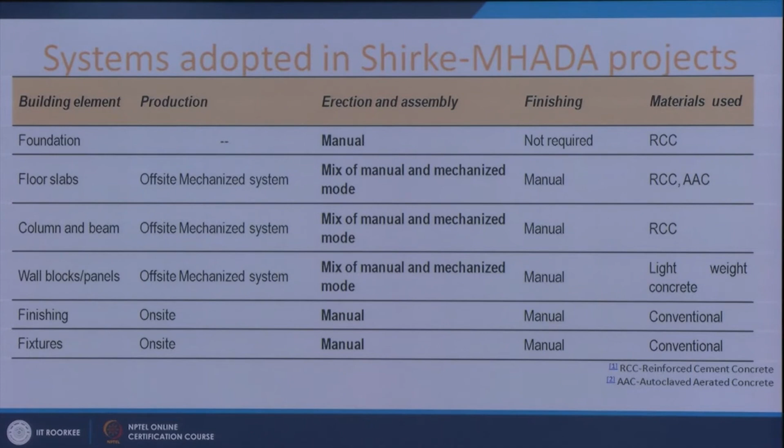The example we have taken is MHADA, Maharashtra Housing and Area Development Authority, which has tied up with a private company, a manufacturer of innovative building materials called Shirke. The partnership between Shirke and MHADA handles most of the affordable housing and housing for the poor across the whole state of Maharashtra, especially in Mumbai and other major cities.

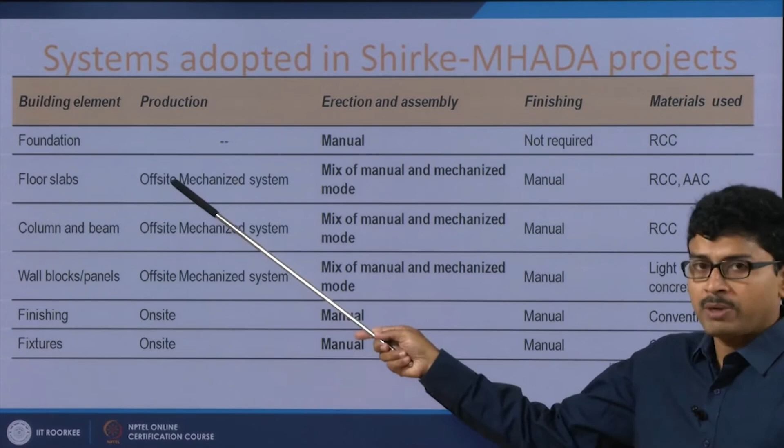The materials used cover every component of the house: foundation, floor slab, columns and beams, wall blocks, finishing and fixtures. For the floor slab to wall blocks, they use an off-site mechanized system with blocks like reinforced concrete block or autoclaved aerated concrete block, or lightweight AAC block. The foundation is done manually and RCC is done on site, and the finishing and fixtures are also done on site.

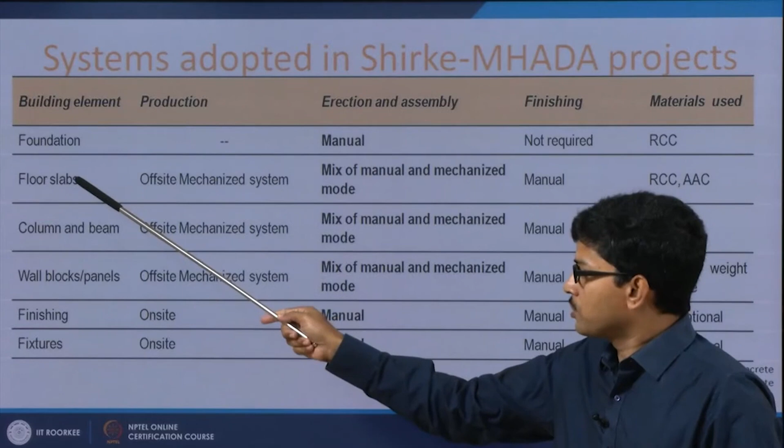Apart from the floor slabs, column beams and wall blocks, the foundation and finishing and fixtures are done on site, mostly using a mix of manual and mechanized modes for floor slabs, column beam and wall blocks. Since foundation and finishing and fixtures take place on site, these are essentially, by and large, manual processes.

To illustrate this, we have taken three different cases, projects at different locations like Mankhurd, Pratiksha Nagar, and Mazgaon in the city of Mumbai. One project is under construction, another was completed a few years ago, about 5 years, and another was completed more than 20 years ago, so that we can understand the quality, durability and performance of this building and housing typology.

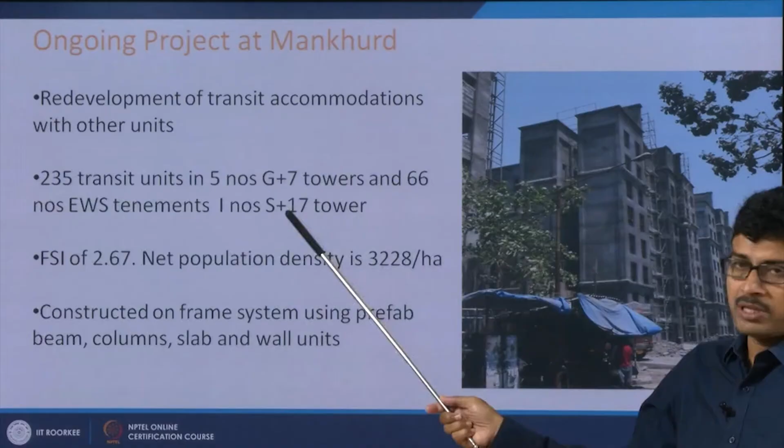This is an ongoing project at Mankhurd. It is a redevelopment of transit accommodations done by MHADA. It consists of 235 transit units in 5 numbers of G+7 buildings, and 66 number of EWS units with stilt plus 17 storied high. They have used an FSI of 2.67, and the density is above 3000 per hectare.

Those coming from a planning or architecture background will understand that this density is quite high in the Indian context. In major cities, the net density calculated in a particular plot is usually around 1000 or 1500 maximum, but here they could achieve more than 3000.

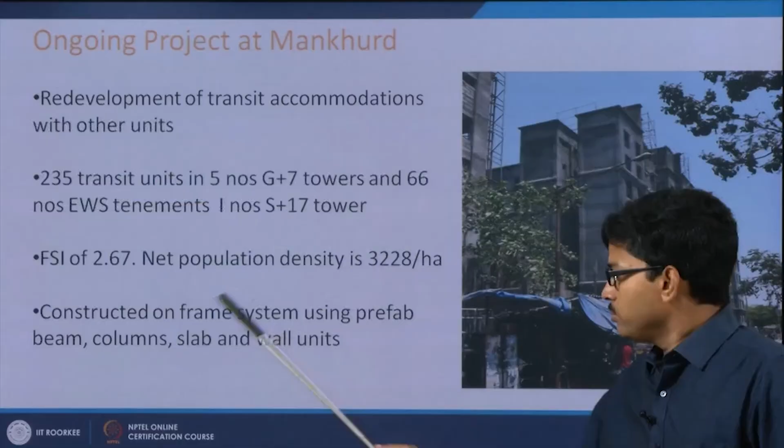They have constructed a frame system using prefab beam, column, slab and wall units. I will show how they have constructed it. You can see how the columns and beams are joined here - this is the typical joint of a column. You can see the socket of a column where a particular beam will be placed and fixed suitably.

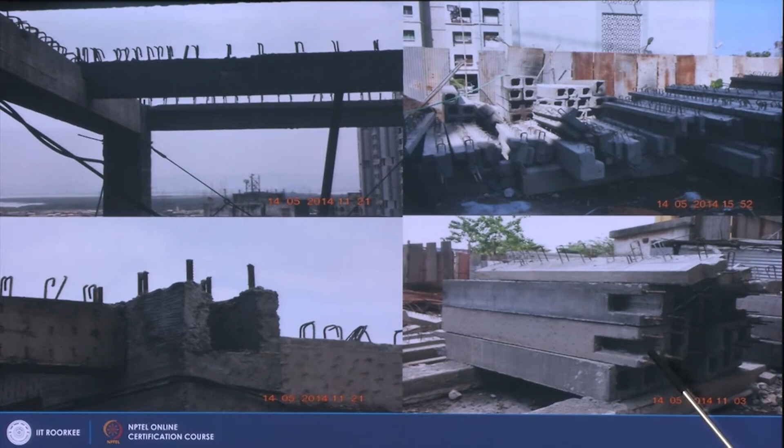These pictures show the column units. Column units have a hole throughout the column length and are inserted vertically like this, so that sockets are available for placing the beams. Here are some of the beam elements, and over the beam you can see the anchoring elements where the slab element will be placed and anchored. I will show a picture so you can understand well.

After placement of the columns and beams like this, they place the slab elements. All slab elements are independent, treated as independent prefabricated elements. Some consist of RCC elements, some consist of cellular concrete block, which is autoclaved aerated concrete element, completely manufactured in their own Shirke factory, and they transport all these materials and put them in this manner.

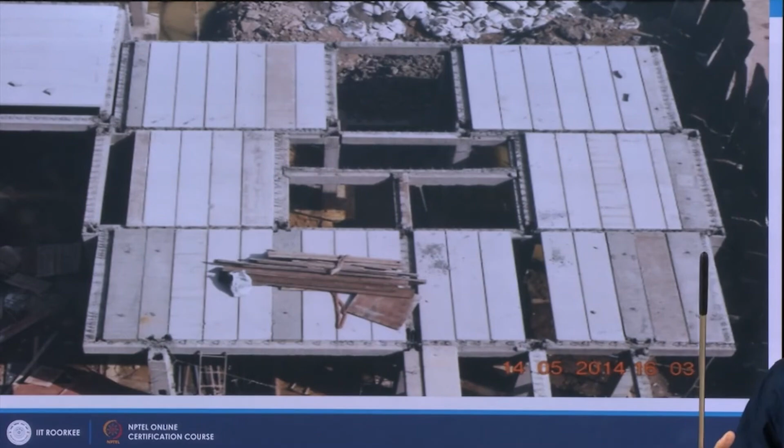After placement of the slab components, they fill the slab over a screed concrete of 3 to 4 inches, and pour concrete into the holes of the column. So the whole column, beam and slab become fixed and more stable, and all the individual components become one integrated, strong component as a whole.

After putting the screed concrete over the slab, it becomes a complete, strong floor. The whole process of placing columns, beams, slabs and screed concrete takes not more than 8 to 10 days, as I learned from field visits conducted in the last 1 or 2 years at various MHADA housing project sites. This floor-to-floor cycle takes not more than 8 to 10 days, though at times it can take a little more depending on the weather, but technically it should not exceed 8 to 10 days.

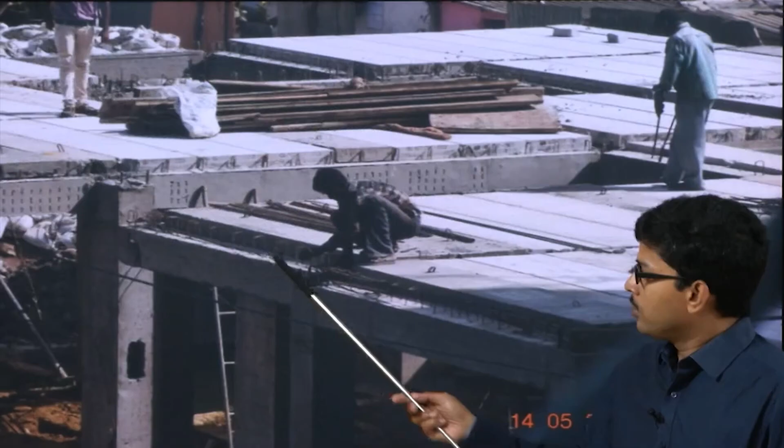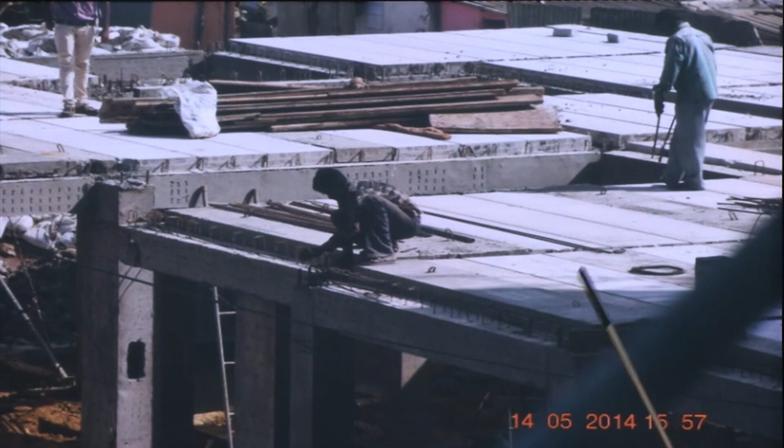Here you can see how a manual lever is used for fine tuning of the slab component and anchoring the slab component with the anchors and stirrups left over the beam component. After this fine tuning, the screed concrete will be put and used.

You can see the typical pictures of the slab component. Every slab component has grooves like that, so that after placement it can act like a solid, unified slab, binding well and locking with each other. This is the picture of a whole typical floor.

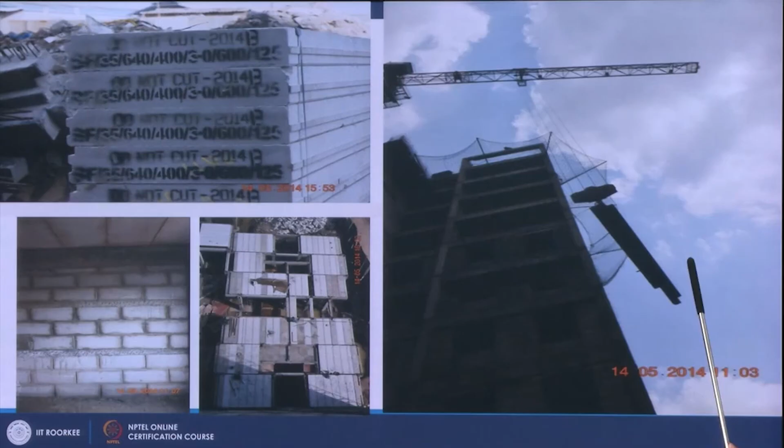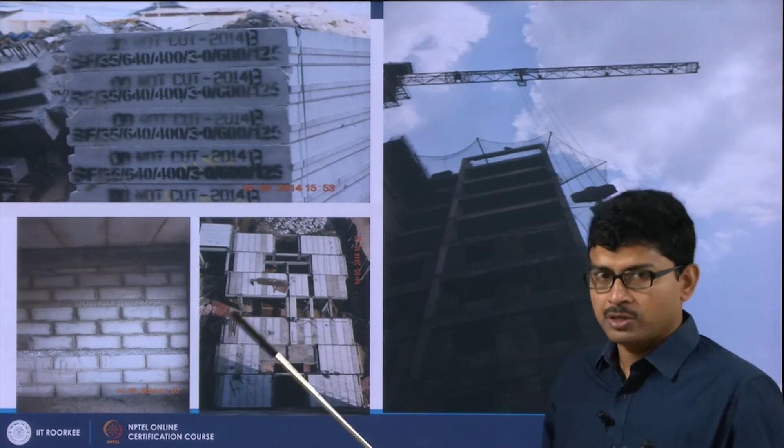This is how they lift any prefabricated component using cranes, and this is a typical picture of a wall component where they use the AAC block, which we call a lightweight block, as a wall component. They also use concrete binder so that it becomes stronger and unified.

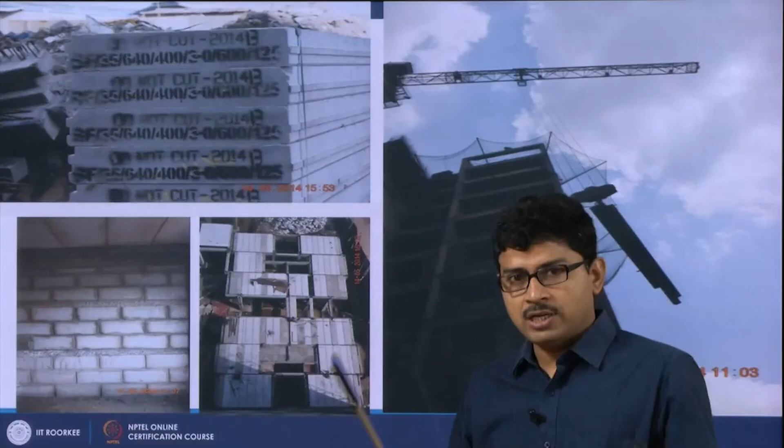These blocks are very lightweight, so a single person can carry them, and they are soft enough that a person can make a groove or break it like a common brick. But they are manufactured in a standardized dimension, so practically you do not need to cut AAC blocks too many times, which reduces the time required for project construction.

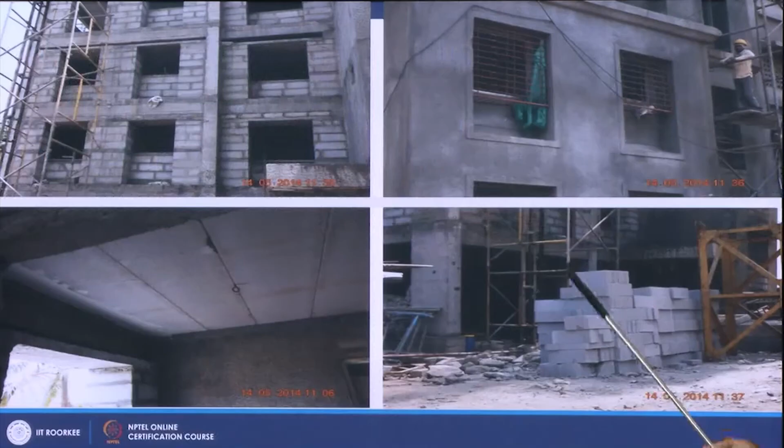In this picture you can see some AAC blocks stacked at the site. These are the window blocks, which are also prefabricated, sometimes at the factory and sometimes at the site, then placed like that.

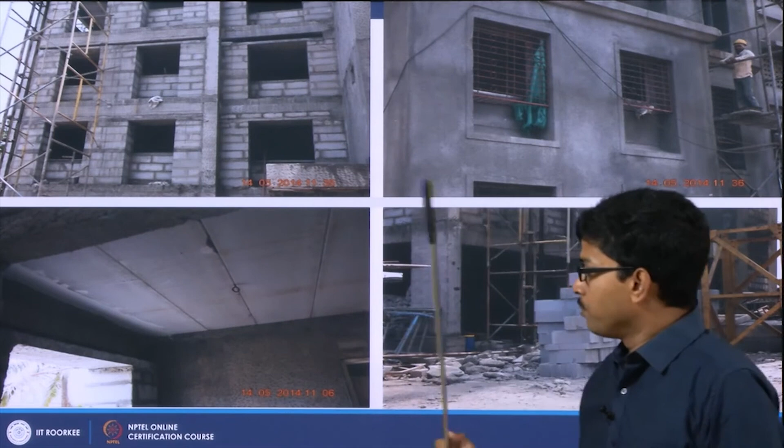These are the AAC block walls, how they look from the outside, and you can see the slab component. This photograph is taken at floor level so you can understand how the joinery and arrangement for the ceiling fan is kept here.

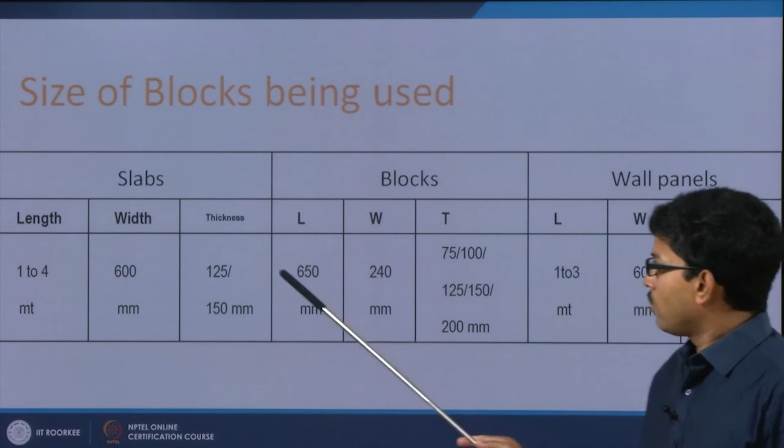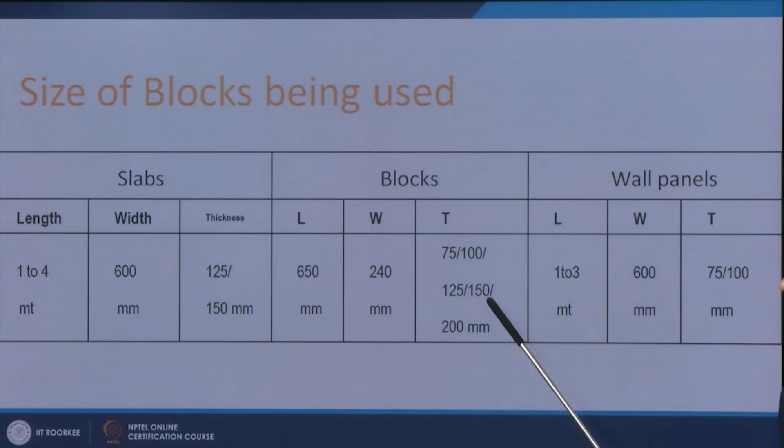So they use slabs, blocks and wall panels in this size. About 600 millimeters is the standard module size they use, and for blocks they use 4 inch, 3 inch, 5 inch or 6 inch modules. The length can be 1 to 4 meters for slabs, 650 for the wall blocks, and 1 to 3 meters for wall panels. Keeping the thickness as 3 to 5 inch and width as 2 feet, they can go up to 1 to 4 meters and 3 meters.

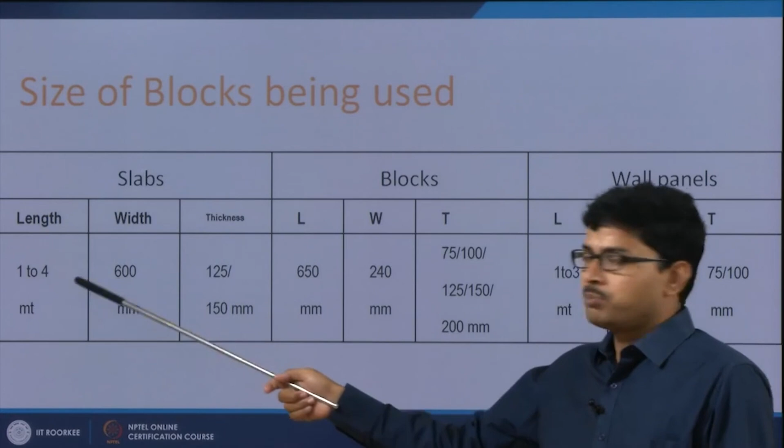Now let us talk about its strength and durability. The whole structure is designed to give a life cycle of at least 50 years against durability and strength, against all possible load components in the building, and they have vetted the design with the help of IIT Bombay.

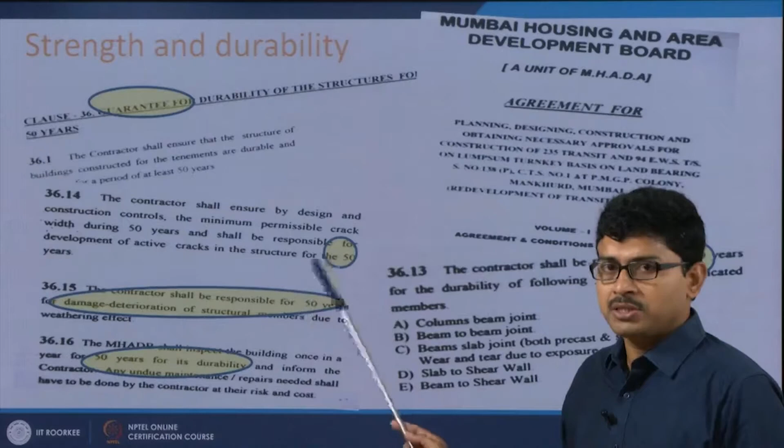This is a clause in the contract between the developer or manufacturer and the government housing board authority, where you can see a 50 year guarantee against durability and strength. So that guarantee is there, and it is still working for more than 20 years. Some of these projects were under construction.

Now these are the arrangements for how they put the conduits for electrical pipelines. Usually in normal RCC construction we place electrical conduits in the roof slab during casting, but here, during the screed concreting discussed earlier, over the prefabricated slab component, they take the conduits like that.

From the screed concrete they take a conduit up to the switchboard level, but in conventional construction it is taken from the ceiling. So that is the difference.

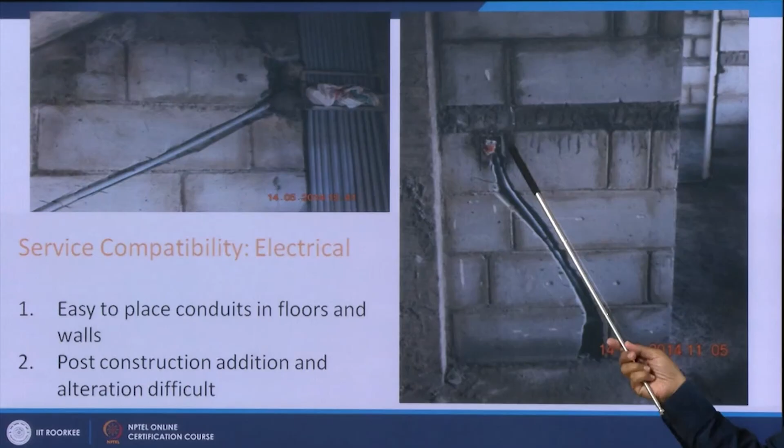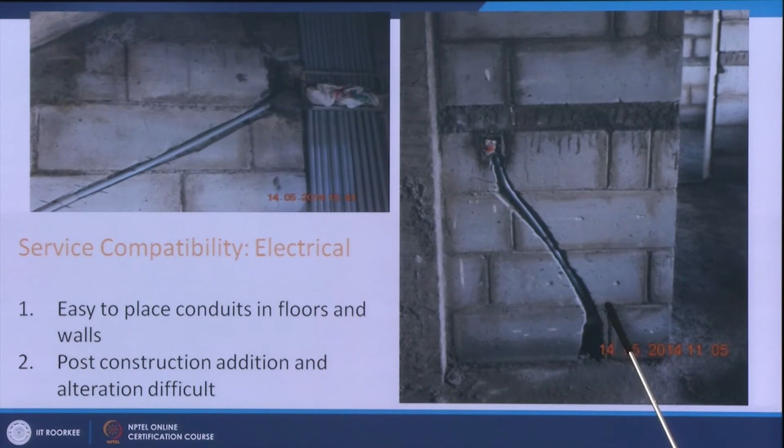Another point is that it can be very easily cut by a common, even semi-skilled, laborer, so they can place a conduit like this too. This is the exposed conduit.

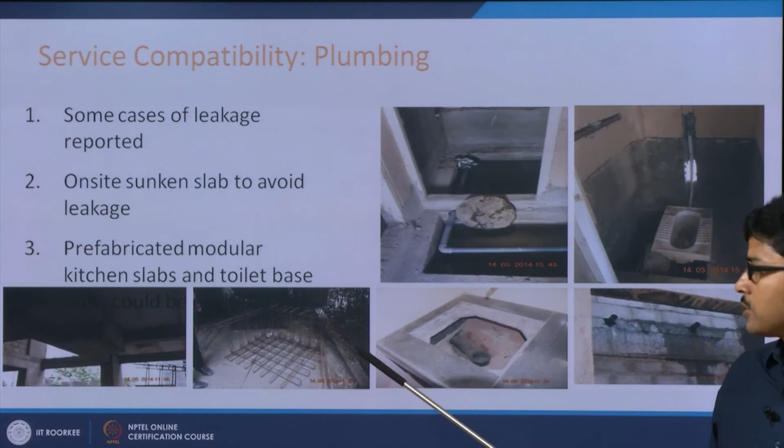These are some pictures showing how the plumbing arrangements are done, the outlets, and some drop slabs which are done in situ. Those could be areas for the next stage of improvement, but overall this is working very nicely as a product and as a design.

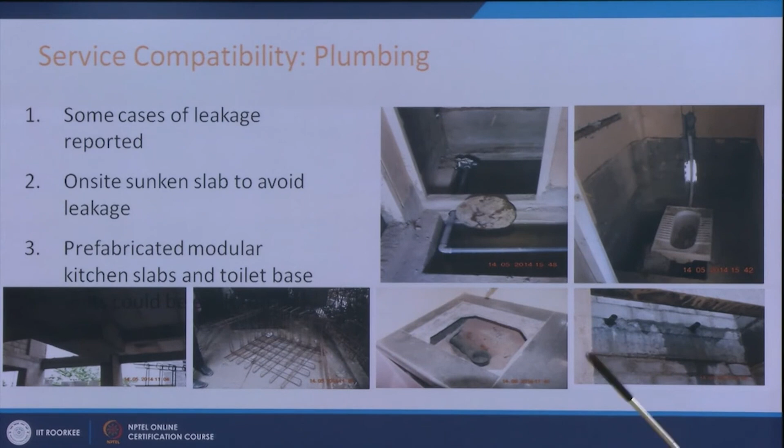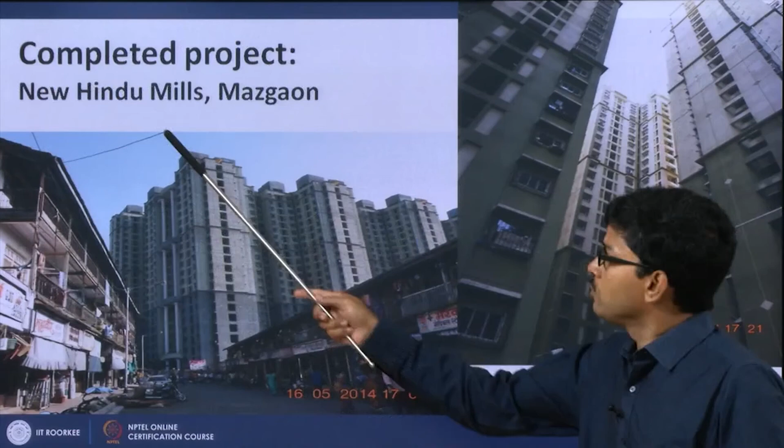These are the pictures which are under construction. Now we will see some of the projects which are already constructed to appraise or to assess their efficacy against the performance. Now this project, the New Hindu Mills project, is in Mazgaon. In Mumbai, you know that there are many mill lands, so the authority or the government of Maharashtra took a policy to use those mill lands for affordable housing projects.

So this is one of the biggest mill land housing projects, called New Hindu Mills. Basically it is a combination of a few mill land housing where they have placed the original staff of the mills, some transit accommodation and a few EWS and LIG population. You can see the adjoining area is full of a kind of slum-like situation, and this is the housing project

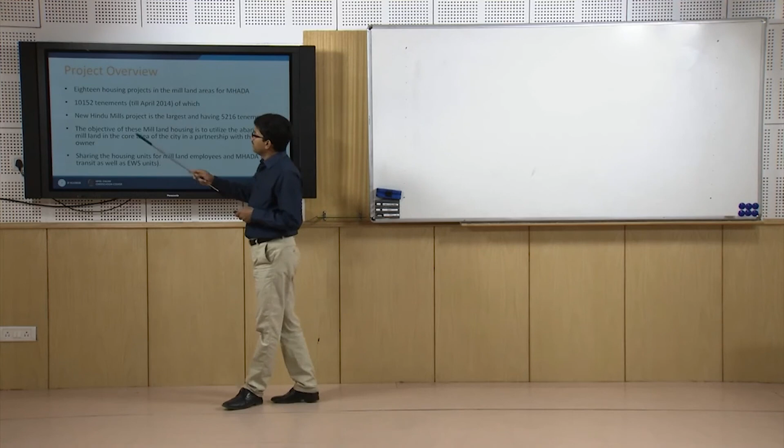which we are discussing. So far 18 housing projects in the mill land were already executed, more than 10,000 units, till 2014 when we took this study. So the New Hindu Mill project is the largest, having more than 5,000 units. It is one of the biggest projects.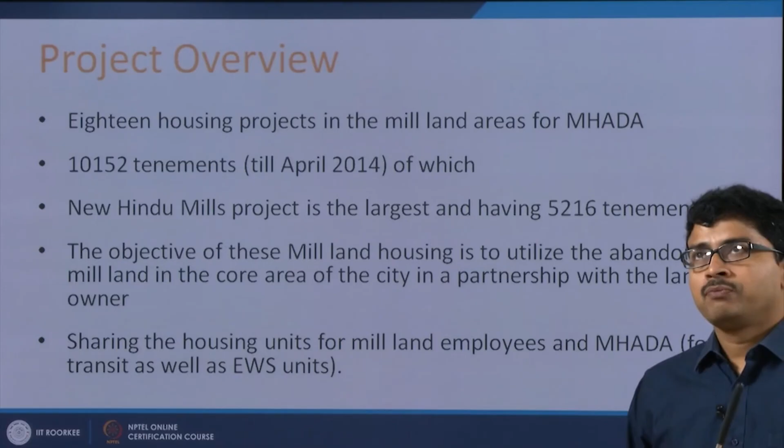So the objective of this mill land housing is to utilize the abandoned mill land in the core area of the city in a partnership with the landowner, and sharing of the housing units for mill land employees and MHADA for transit as well as EWS units. For redevelopment of the other projects, other slums, some transit houses will be required. So those transit houses will be accommodated in this project. That was one of the objectives.

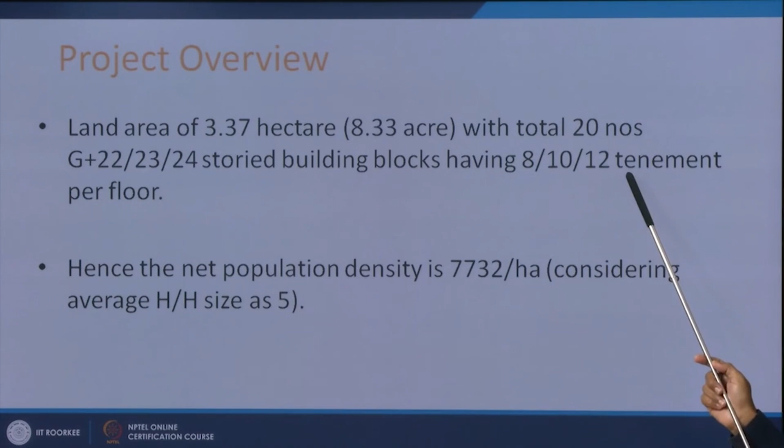So you can see the land area was more than 3 hectares, 3.37 hectares, and it was full of G plus 22, 23, 24 storied blocks having 8 to 12 tenements per floor, and you can see the density. It is a very high density project with a compact development, but with this density at least the housing units are affordable for the lower income group or economically weaker section. Otherwise it is not affordable.

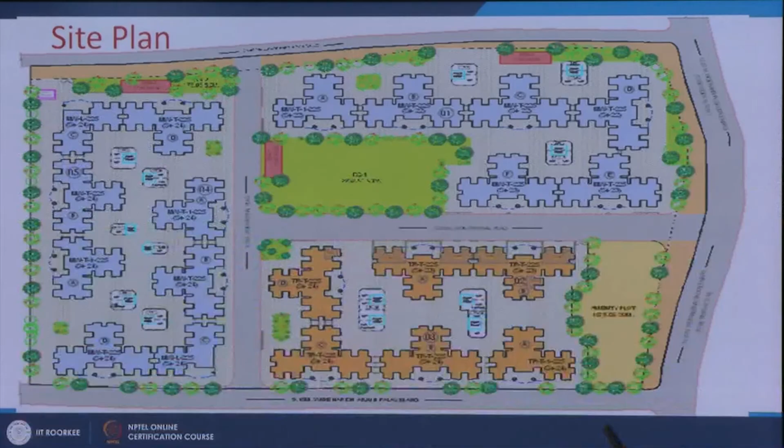You can see the layout plan. Each building block is joined together in such a way that it makes internal courtyards for enough light and ventilation, and you can see the typical building unit is repetitive, because we talked last day also that the whole industrialized or prefabricated process runs on standardized design, standardized modules. So each housing unit consists of a standardized module. We will see one such module in detail in the next slide.

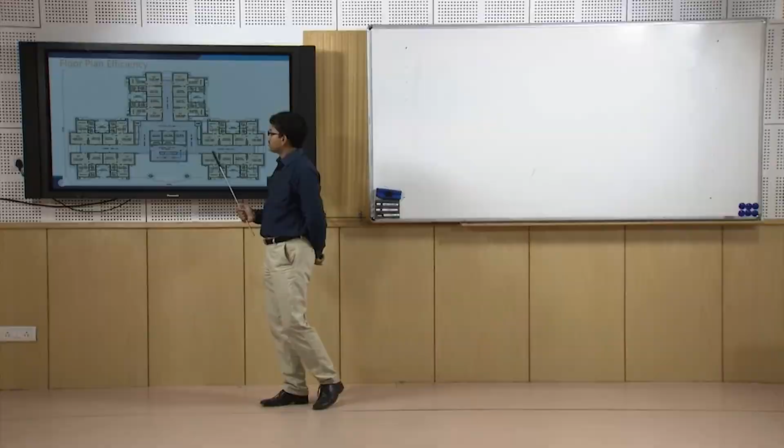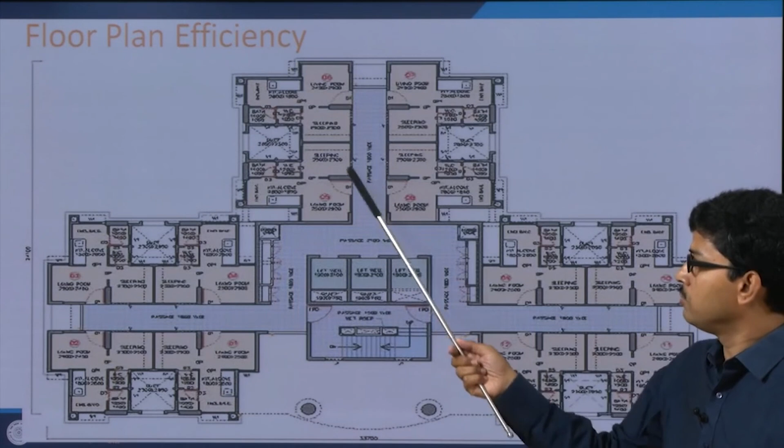So this is a standardized module of a typical building block. It consists of 12 units. This is one unit consisting of one multi-purpose room or living room, one bedroom, one WC and one bath area and one kitchenette with some storage area, and this is the common core with staircase and lift block, whereas these are the common lobbies to provide access to each and every unit. So this is the standardized module which they use.

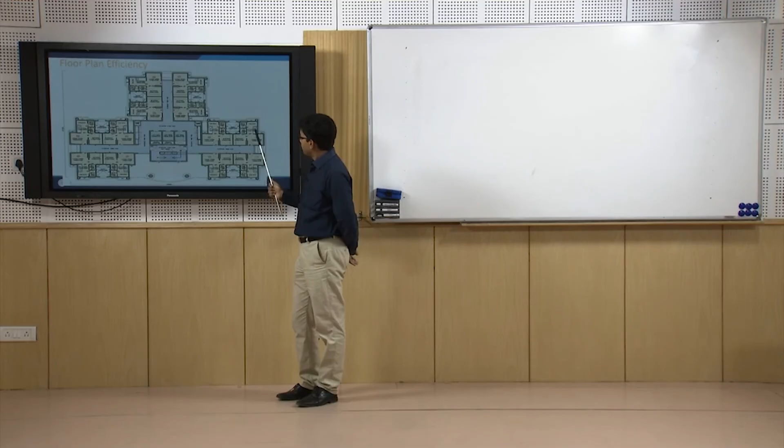Out of this module, components like the lift shaft, lift core and the staircase core are done in situ using RCC basically, and some elements like bigger columns are also RCC, but apart from that most of the elements are done by prefabricated wall blocks and prefabricated components.

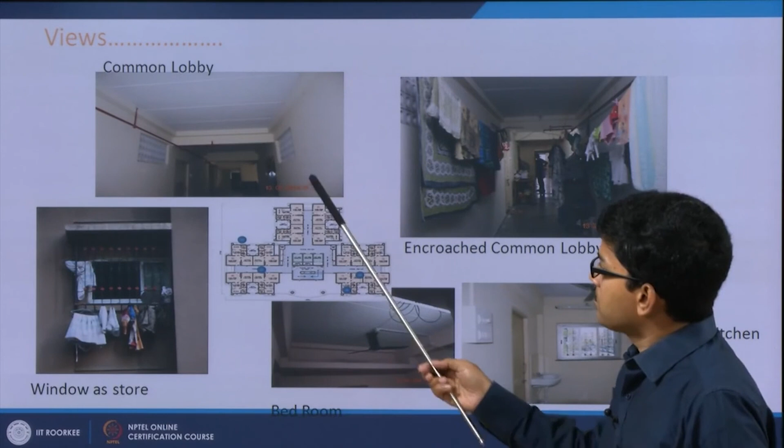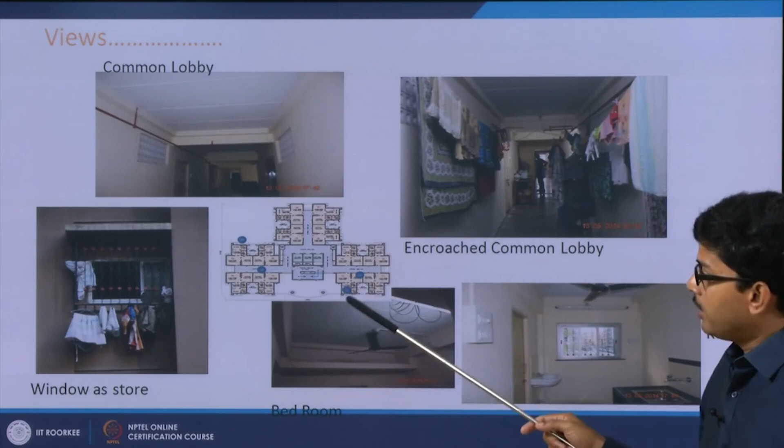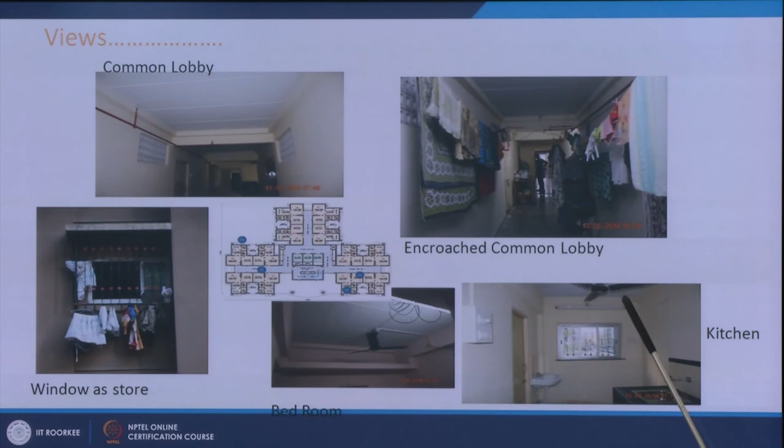This is the picture of a finished floor, where you can see the placement of the slab component from the bottom. It is painted in colors, and this is the picture of the typical kitchen, where you can see the kitchen slab and the slab component. Only one thing: since this particular design does not have any balcony as such, they are using the windows for day-to-day storage, or in a few cases we have found that they have used the lobbies for keeping their day-to-day things.

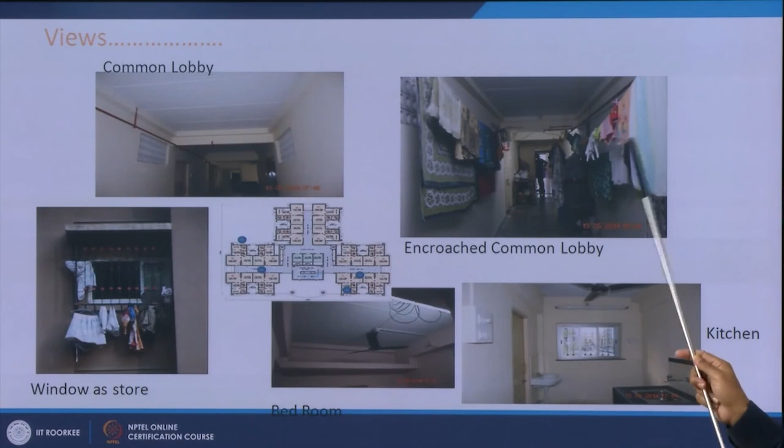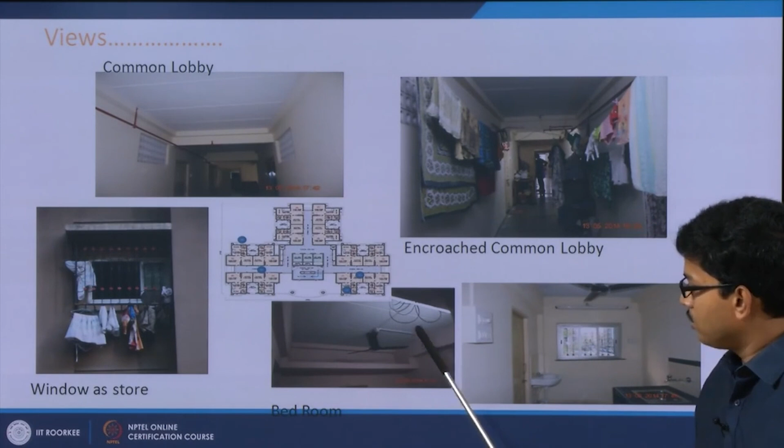And this is the picture taken from inside, where you can see the internal arrangement of the slabs and how they have taken the electrical pipelines, which are basically exposed. So these are the variation and the outcome of the project. This is the typical unit plan having one living room, one bedroom, kitchen and the WC and one bath.

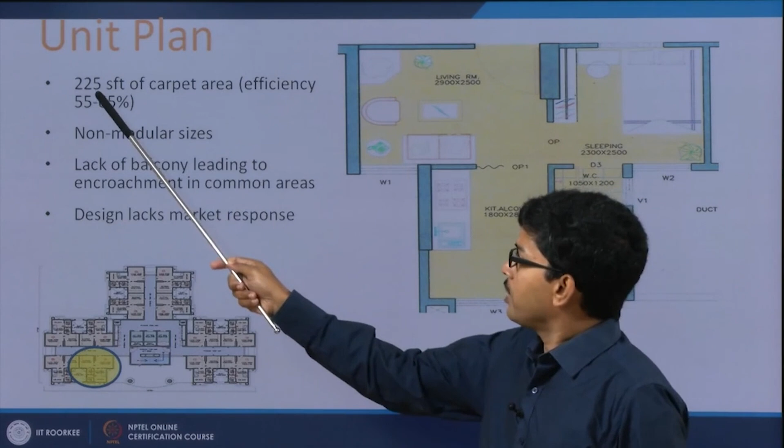Now, this is a very compact design, within 225 square feet of carpet area. The only thing is that it could accommodate another very small balcony, so that people could use it in a multi-purpose way. Other than that, it is a very nice design to generate affordable houses within this price and within this much time.

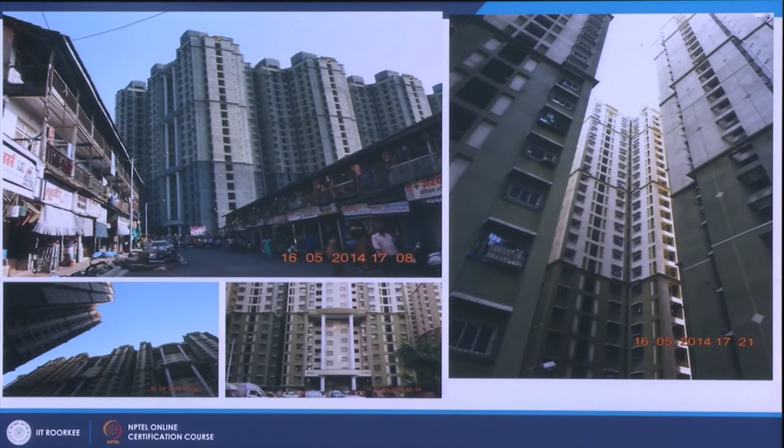So these are the general views of the project. You can see it is a huge project. This is the view from inside the courtyard of the project.

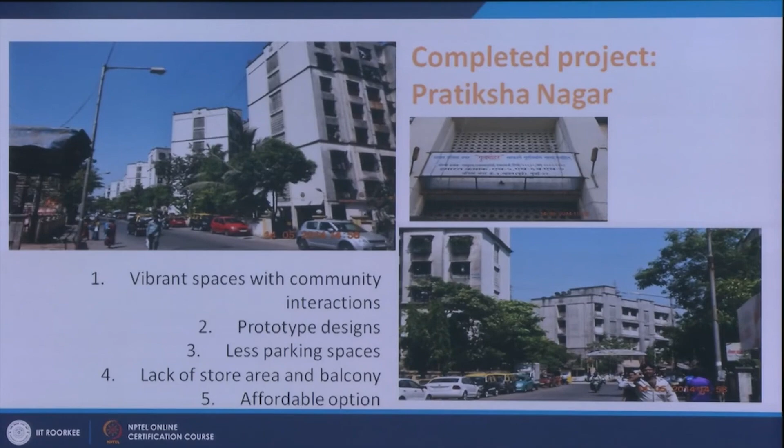Some other views. Now we come to one project which was completed long back, more than 20 years ago, to see its quality. It is the Pratiksha Nagar housing project. You can see the projects like this.

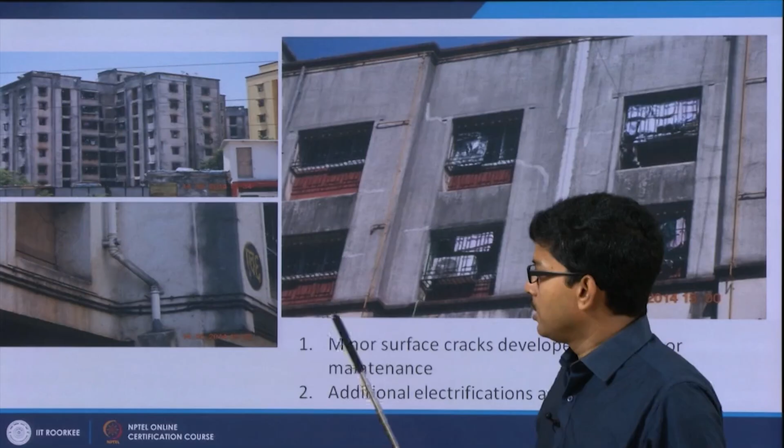Some surface cracks were seen during the investigation, during our visit, but those surface cracks developed due to poor maintenance. Basically it is not a structural crack as such, because the structure is durable enough, giving 50 years of durability and strength as per the design. So because of the poor maintenance of the projects, it is showing a little bit of cracks and some different colors, but otherwise this structure is good enough.

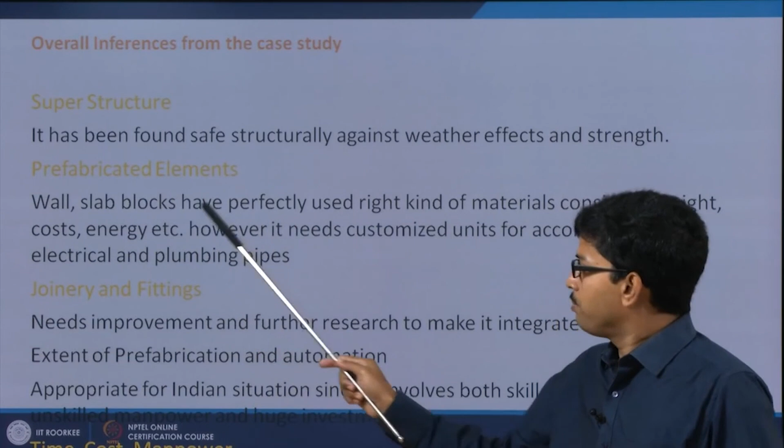So the overall inference from this particular set of projects is that the superstructure has been found structurally safe against weather effects and all kinds of load features, like live load, dead loads and seismic load, everything. The prefabricated elements like wall and slab blocks have used the right kind of materials considering weight, cost, energy. However, it needs customized units for accommodating electrical and plumbing pipes.

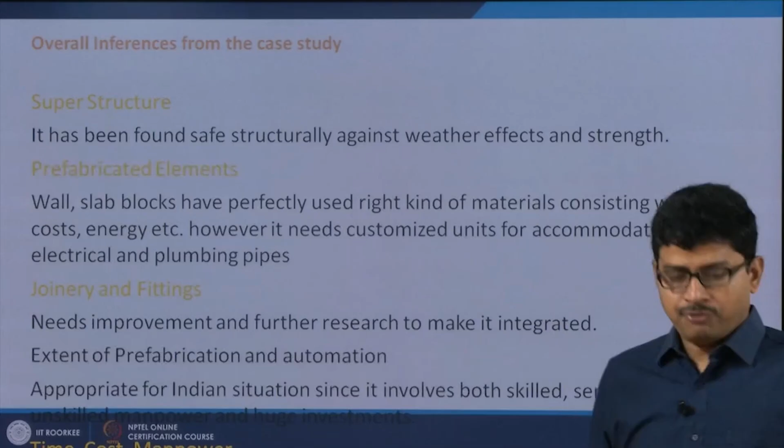When we discussed at the site, we understood that some of the units could be integrated to have the plumbing and electrical installation, so that during construction somebody doesn't have to make the grooves separately. Joinery and fittings are the areas where further improvement can be done, but as of now the projects are functioning in absolutely good condition. It is a very viable and feasible option using frame construction in the Indian context.

Now let us see a comparative cost of the two projects. To compare, we have taken other projects. We took Sukho Brishti, which is being developed by Shapoorji Pallonji in Kolkata as lower income group housing, and we have taken Subho Griha, which is developed by Tata Housing, and also we have taken New Hindu Mills Housing. We have taken the cost component from their websites.

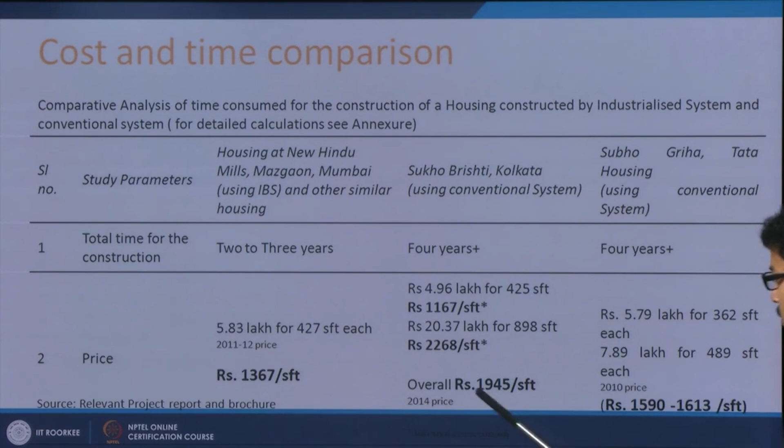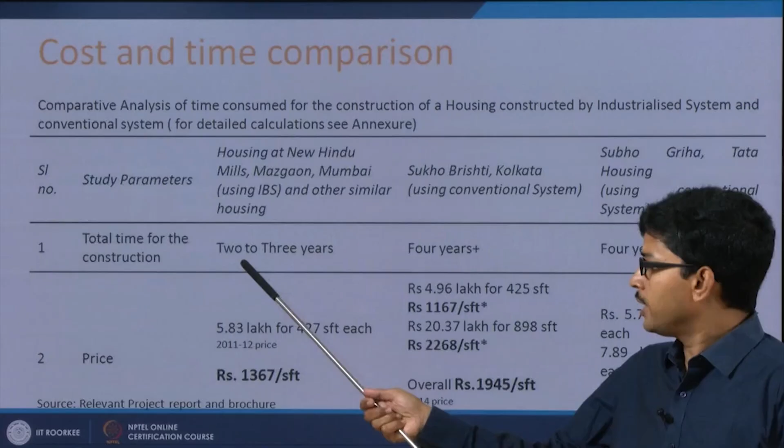So you can see the cost component is much lower than the other conventionally constructed projects, almost 30 to 40% cost savings are there. And if you see the time, Sukho Brishti and Subho Griha are taking more than 4 years, but New Hindu Mills Housing has taken 2 to 3 years, because this project is a very large project. Otherwise in other projects they have taken 1.5 years or 2 years or even less than that.

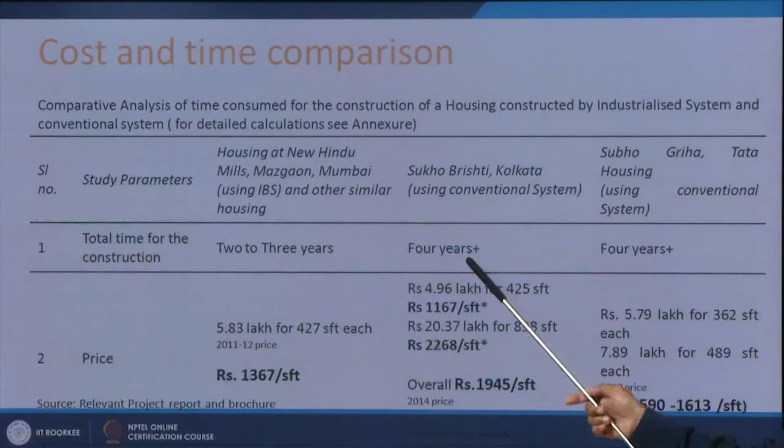So the median duration of the project is 1.5 years for a mid size, like say 500 units or so, but here the project was so big, 5,000 units, that it took 2 to 3 years. Still it is less than the other conventional projects.

So now we come to the present status of India. In India now we have the Pradhan Mantri Awas Yojana by the government of India. Next day we will discuss the Pradhan Mantri Awas Yojana in detail, and under the Pradhan Mantri Awas Yojana one technology sub-mission is conceptualized. In this technology sub-mission they have identified a total of 16 technologies, and IITs and NITs are acting as a research hub for the technology sub-mission, because not all the technologies they identified are tested in the field, except 1 or 2 which I showed today. That's why it is under experimentation.

So let us summarize the discussion we had today before I conclude. Today we discussed some examples of the industrialized building system in Indian conditions. We said that in India after independence there was a lot of experimentation in materials and building systems by government organizations and NGOs, but those were basically focused on a particular building component or material.

But today we showed another example where a government agency, in partnership with a private developer, is delivering a complete project using totally prefabricated units, prefabricated columns, beams, slab components and wall block components, so that the project is completed within 2 years for a mid-size mass housing project. The other conventionally constructed projects are taking 4 to 5 years, but here they are taking 2 years median, and the project cost is also less than the other projects.